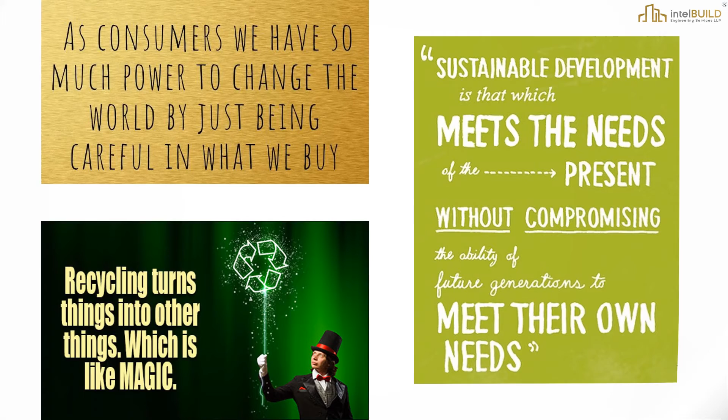Structural steel, the premier green construction material. Its high recycled content and recycling rate exceed those of any other construction material. Over the past three decades, the steel industry has reduced greenhouse gas and overall emissions by 36% and increased the water recycling rate of steel production to 95%. Today, the American steel industry is the least carbon-intensive of all major steel-producing countries, and its footprint will continue to decrease as the U.S. power grid becomes more fossil-free.

As the green building movement grows, more and more building owners, architects, engineers, and contractors are selecting structural steel framing systems to meet sustainable design and construction goals.

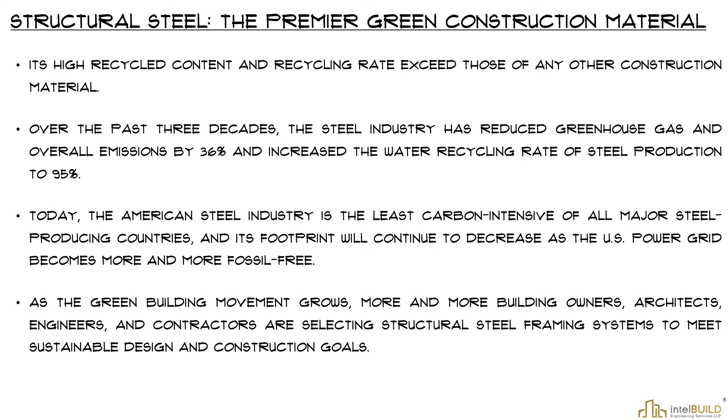Structural steel produced in the United States contains 93% recycled steel scrap on average. At the end of a building's life, 98% of all structural steel is recycled back into new steel products, with no loss of its physical properties. As such, structural steel isn't just recycled but multi-cycled, as it can be recycled over and over and over again. It is truly a cradle-to-cradle material.

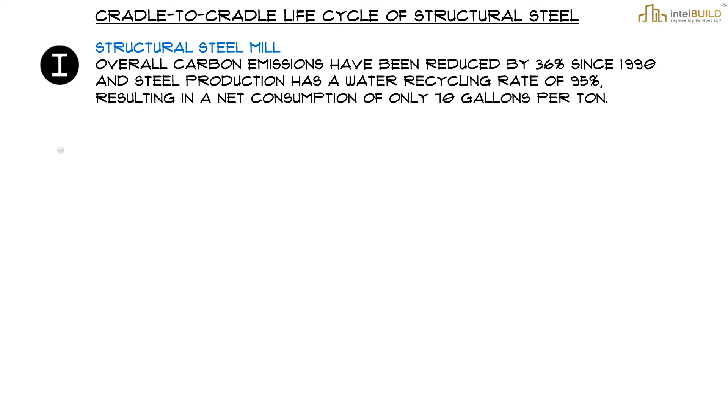Cradle-to-cradle life cycle of structural steel. Structural steel mill: overall carbon emissions have been reduced by 36% since 1990, and steel production has a water recycling rate of 95%, resulting in a net consumption of only 70 gallons per ton.

Construction and erection. Steel is fabricated off-site to strict tolerances and can be erected quickly in the field, meaning fewer workers on the job site, safer working conditions, shorter construction schedules, and reduced emissions from construction equipment.

Building operation. Long span beams with open, column-free spaces attract potential occupants. In addition, steel framing can more easily be adapted for future changes in loading conditions, vertical expansion, and changes in occupancy when compared to other framing systems.

Deconstruction. Beams, columns, and other structural steel elements removed from a building can be refabricated for use in new structures without having to be melted and rolled. The remaining steel elements are captured as scrap and used to create new steel products.

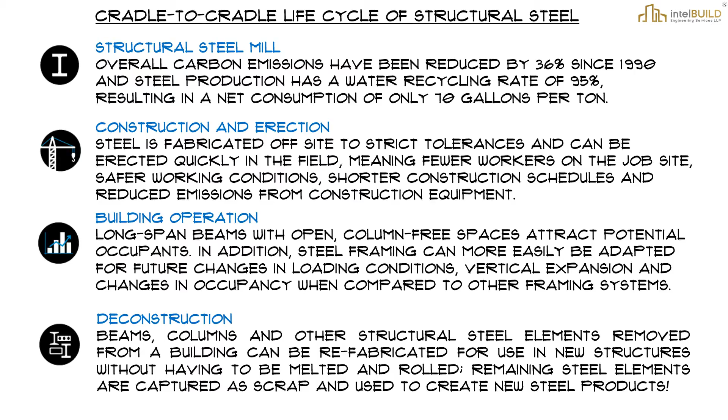Scrap collection. By weight, 81% of all steel products are recovered for recycling at the end of their life. This includes 85% of automobiles, 82% of appliances, 70% of containers, 72% of reinforcing bar, and 98% of structural steel.

Scrap processing. Steel is the most recycled material in the world, with domestic mills recycling more than 70 million tons of scrap each year. Currently, structural steel includes 93% recycled content.

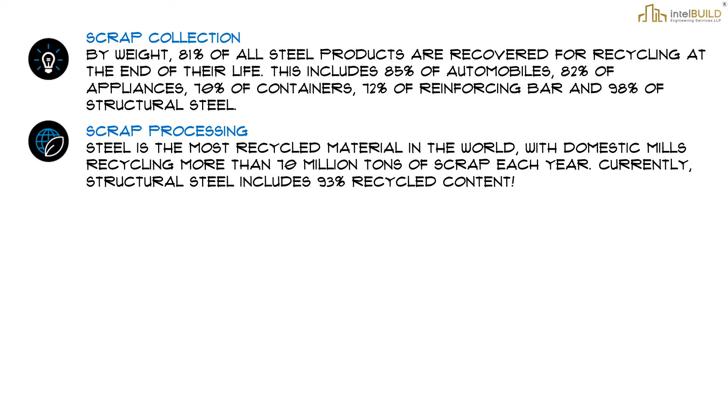Ten reasons to use structural steel. Why use structural steel? Here are the top 10 reasons. Cost-effective: compared to other framing materials, structural steel brings greater value to a project in terms of initial cost as well as reduces costs in other areas, such as foundations, general conditions, and facade systems.

Accelerated schedules. Structural steel is fabricated off-site while preliminary site preparation and foundation work are being performed. It is then brought to the site and rapidly erected, accelerating the overall project schedule. This is a major advantage, as the structural framing system is always on the critical path of the project regardless of material. Increase usable floor space.

Structural steel is both light and strong, allowing for long spans and open, column-free spaces. Aesthetically pleasing: structural steel frames provide designers with a wide range of options for addressing a project's aesthetic requirements. Structural steel can be rolled, curved, and integrated into irregular building shapes. At the same time, its small footprint contributes to a sense of transparency for the building.

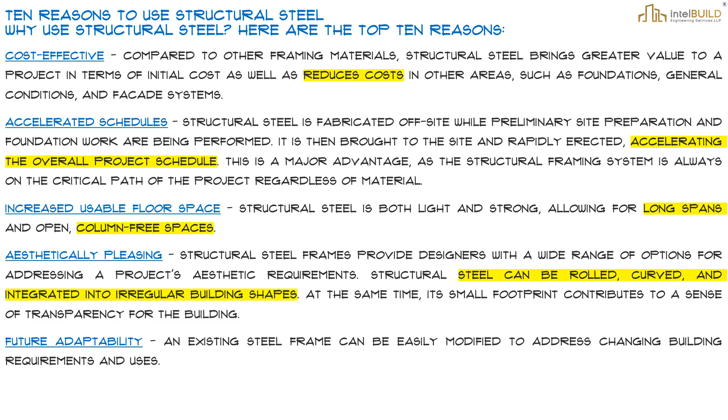Future adaptability: an existing steel frame can be easily modified to address changing building requirements and uses. Quality and predictability: structural steel is fabricated off-site under controlled conditions, ensuring a high-quality product and reducing the number of costly fixes at the job site. This also allows for just-in-time delivery, which accelerates the overall project schedule.

Ease of design. Structural steel is produced to precise tolerances and consistent strength levels, which, when combined with an established, well-documented design approach, can greatly simplify the design process.

Enhanced productivity. Structural steel leads the construction industry with a fully integrated supply chain that uses advanced technologies like computer-aided manufacturing and building information modeling (BIM) at all stages of design and construction. These technologies have been proven to reduce or eliminate errors, improve safety, and lower project costs.

Green. Today's modern steel mills produce steel containing an average of 93% recycled material. At the end of a building's life cycle, 100% of the steel frame can be recycled. The current recovery rate for structural steel is 98%. With low environmental impacts on a per square foot of construction basis, steel is the premier choice for environmentally conscious, sustainable projects. There's always a solution in steel.

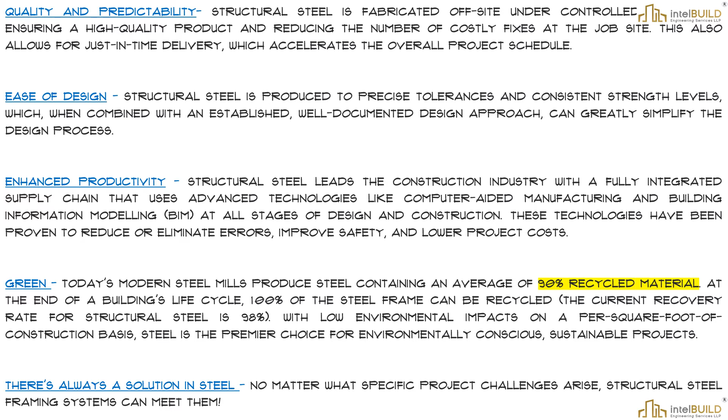No matter what specific project challenges arise, structural steel framing systems can meet them. It takes a huge amount of time and energy to create an elegant structural system. Why hide all that work when you can show it off?

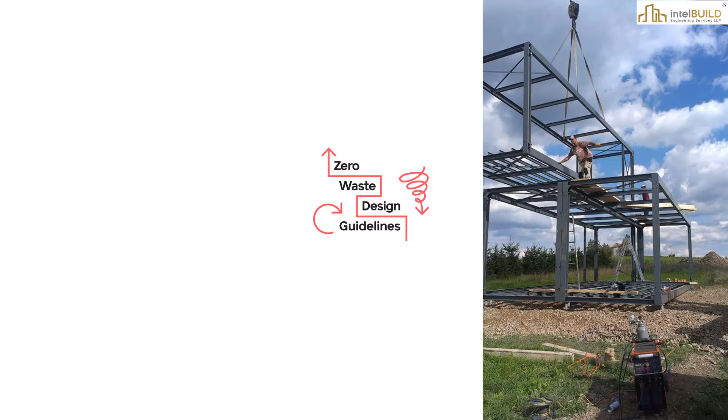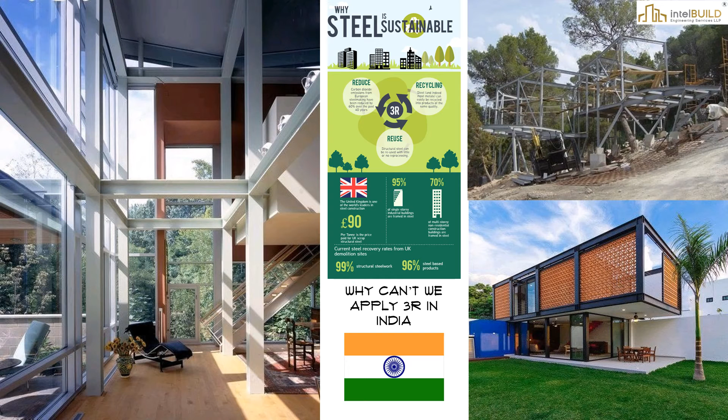The 3R system: reduce, recycle and reuse.

External and internal walls use precast cement concrete wall panels, steel structure combined with precast concrete products. Precast concrete elevation panels can be fixed on steel frames. The precast panels are made from cement, fly ash, aluminum oxide, and other filling materials.

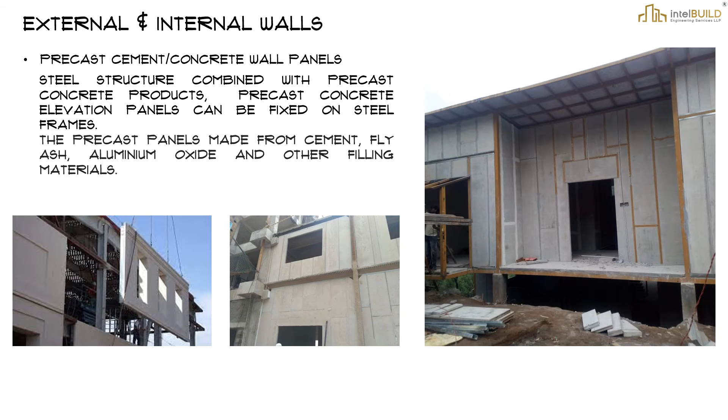Siporex block masonry work. Siporex is a natural and non-toxic construction material by design, which saves energy and is environmentally friendly. While the basic raw materials are sand, water, aluminum powder, and cement, the sourcing and manufacturing of the product are highly sustainable to ensure eco-friendly production.

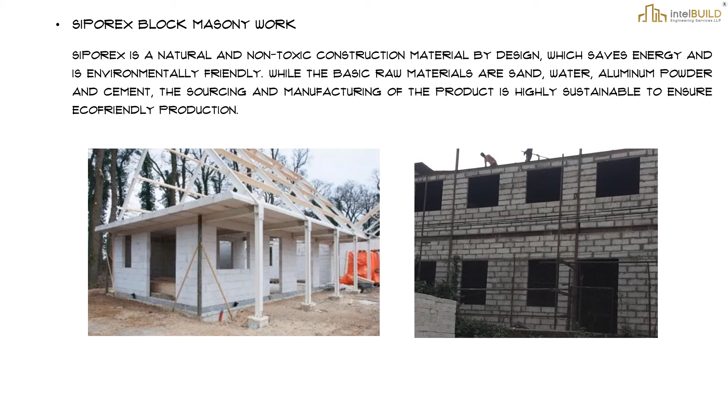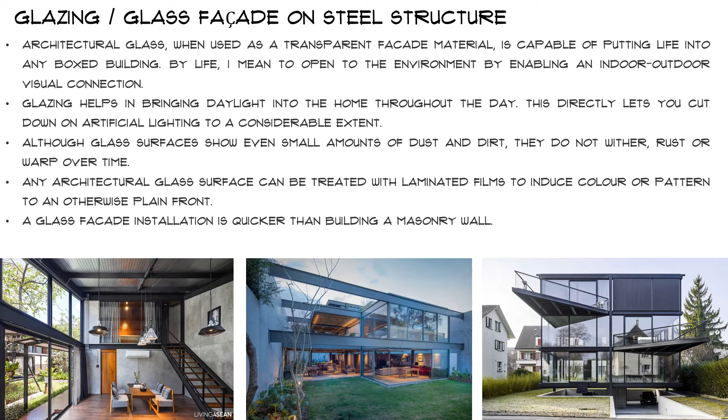Glazing, glass facade on steel structure. Architectural glass, when used as a transparent facade material, is capable of putting life into any boxed building. By life, I mean opening it to the environment by enabling an indoor-outdoor visual connection. Glazing helps in bringing daylight into the home throughout the day, which directly lets you cut down on artificial lighting to a considerable extent. Although glass surfaces show even small amounts of dust and dirt, they do not wither, rust or warp over time. Any architectural glass surface can be treated with laminated films to induce color or pattern to an otherwise plain front. A glass facade installation is quicker than building a masonry wall.

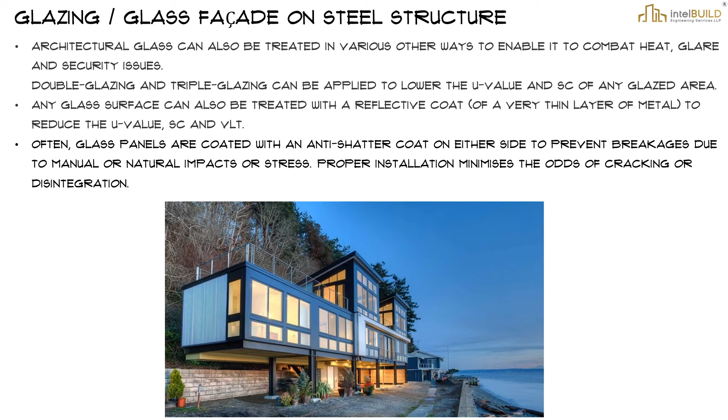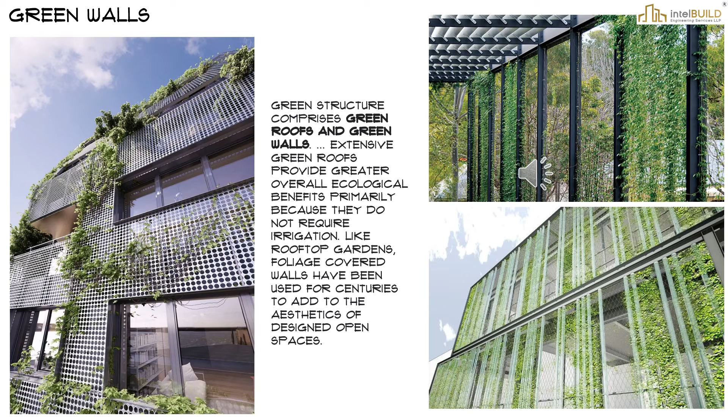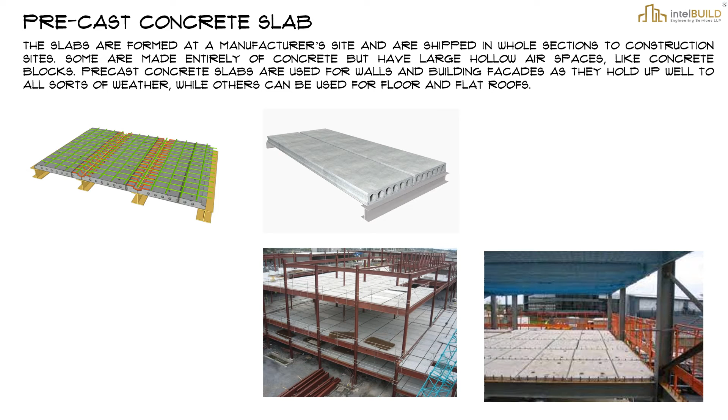Precast concrete slab. The slabs are formed at a manufacturer's site and are shipped in whole sections to construction sites. Some are made entirely of concrete but have large hollow air spaces, like concrete blocks. Precast concrete slabs are used for walls and building facades as they hold up well to all sorts of weather, while others can be used for floor and flat roofs.

Galvanized decking sheets. Structural decking sheets in the form of SmartDek and EzyDek are innovative systems specially developed for the Indian construction fraternity. Structural decking is an economic steel formwork deck that provides a stable and safe working platform to allow wet concrete to be poured. Structural decking also acts as a tensile reinforcement, imparting strength to the concrete slab. The steel decking sheets are suitable for all forms of construction like masonry, steel frame, concrete frame and all segments.

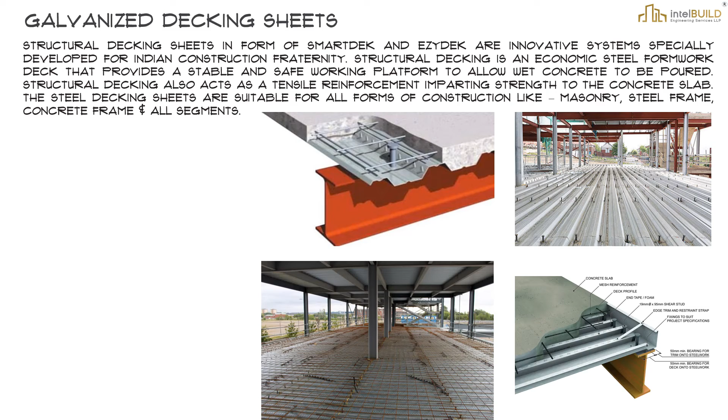Canopy design: the projected element just above the window. It shades the opening, stops rain from entering the room, and reduces sky glare while looking out of the room.

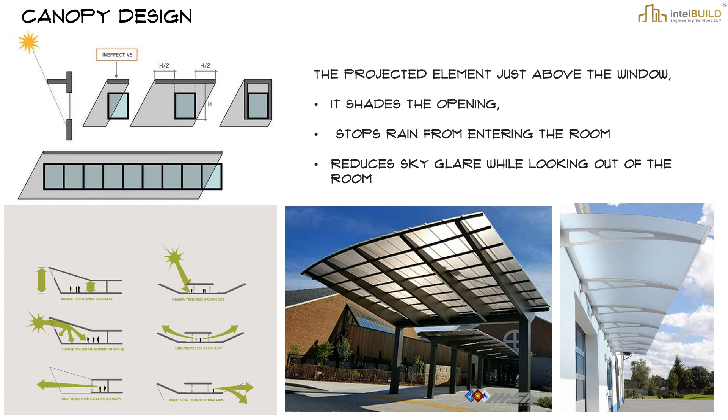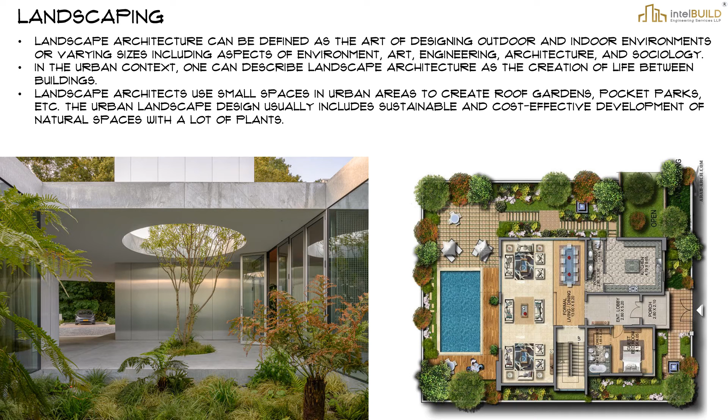Landscaping. Landscape architecture can be defined as the art of designing outdoor and indoor environments of varying sizes, including aspects of environment, art, engineering, architecture, and sociology. In the urban context, one can describe landscape architecture as the creation of life between buildings. Landscape architects use small spaces in urban areas to create roof gardens and pocket parks. The urban landscape design usually includes sustainable and cost-effective development of natural spaces with a lot of plants, helping combat toxicity and other environmental issues, and offering customizable and sustainable development avenues.

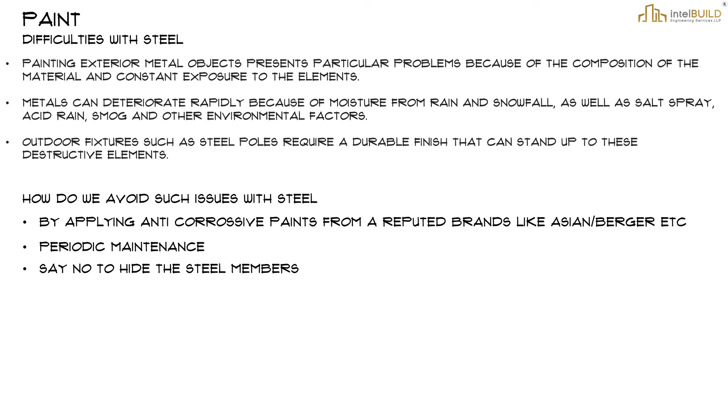Paint difficulties with steel. Painting exterior metal objects presents particular problems because of the composition of the material and constant exposure to the elements. Metals can deteriorate rapidly because of moisture from rain and snowfall, as well as salt spray, acid rain, smog, and other environmental factors. Outdoor fixtures such as steel poles require a durable finish that can stand up to these destructive elements. How do we avoid such issues with steel? By applying anti-corrosive paints from reputed brands like Asian Paints or Berger. Periodic maintenance is needed - say no to hiding the steel members.

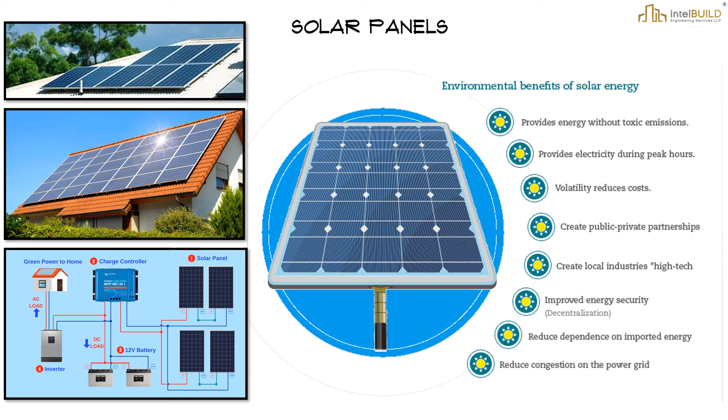Solar panels. Environmental benefits of solar energy are: provides energy without toxic emissions, provides electricity during peak hours, volatility reduces costs, creates public-private partnerships, creates local high-tech industries, improved energy security, decentralization, reduced dependence on imported energy, and reduced congestion on the power grid.

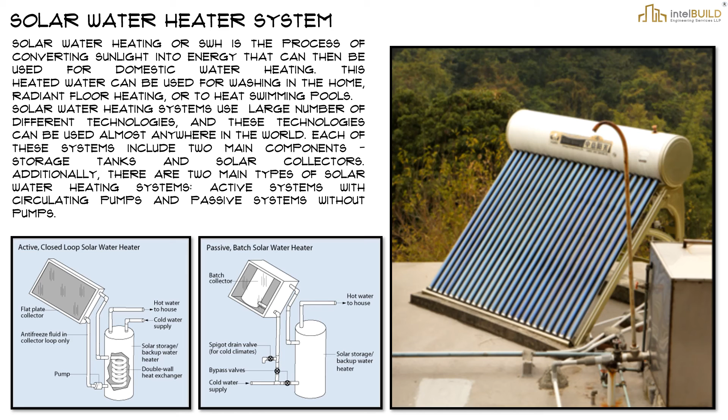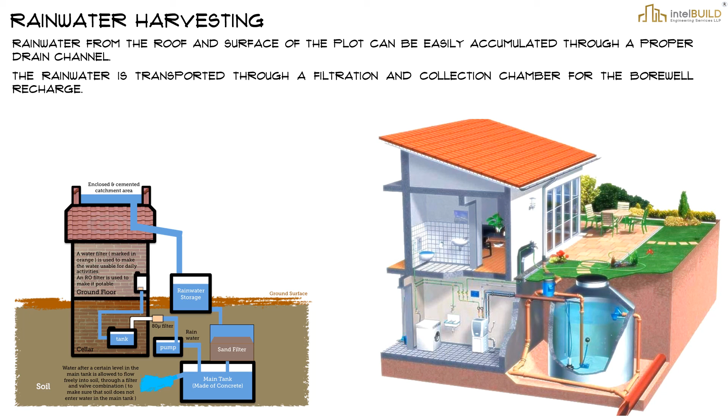Rainwater harvesting. Rainwater from the roof and surface of the plot can be easily accumulated through a proper drain channel. The rainwater is transported through a filtration and collection chamber for the borewell recharge.

What is our product, and why is it preferable? We have been in the industry for the last 3 decades. In our practical experience, we have faced certain issues in relation to typical traditional construction materials and methodologies: depletion of natural resources, excessive carbon emissions, accumulation of non-recyclable waste, and effects on the ecosystem.

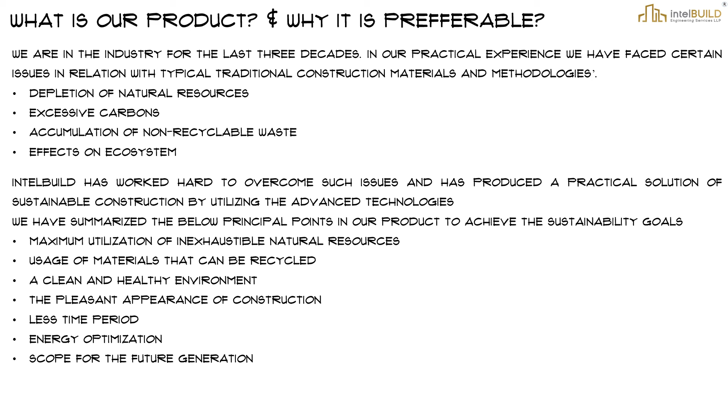IntelBUILD has worked hard to overcome such issues and has come up with a practical solution for sustainable construction by utilizing advanced technologies. We have summarized the below principal points in our product to achieve the sustainability goals: maximum utilization of inexhaustible natural resources, usage of materials that can be recycled, a clean and healthy environment, the pleasant appearance of construction, less time period, energy optimization, and scope for the future generation.